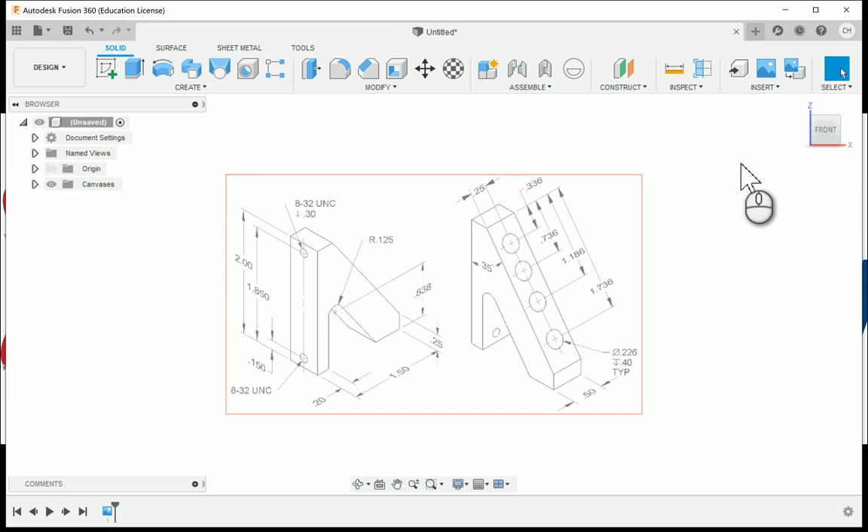In this video, we're going to take a look at modeling the Arbor Press punch holder. Here's a picture of the punch holder that we're going to go from. This is what you'll see on your activity and in the curriculum, and we're going to go through and model this part.

I'm going to go ahead and suppress this picture there. What we're going to do from here is create a new component. We'll call this the Arbor Press punch holder.

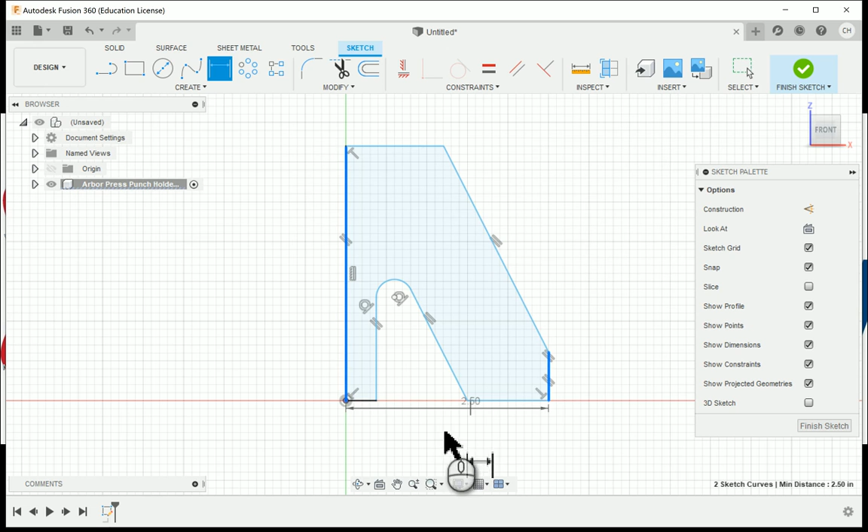What we're going to do is create a new sketch here, and we're going to create that on the front plane. To start off, we're going to go ahead and draw the profile.

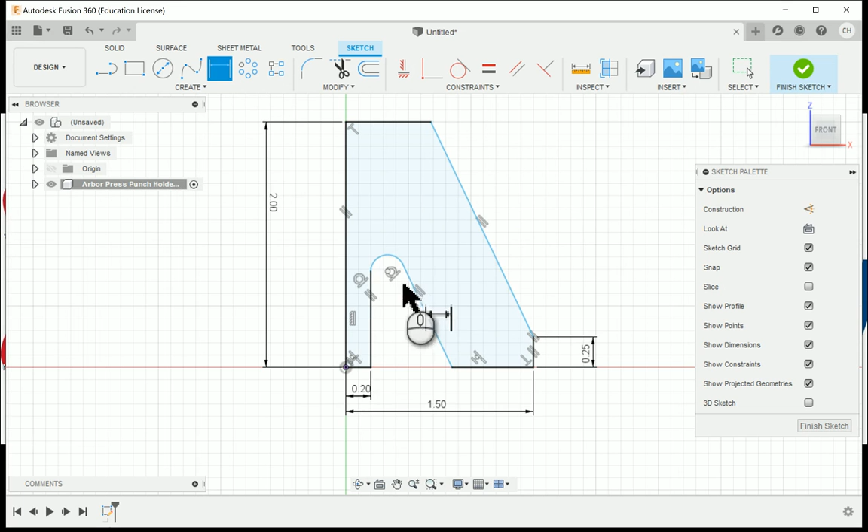When I get to this point, I'm going to show you there's a little trick here. I can actually go through and draw utilizing the line tool. The way I do that is I move my mouse out, come back to this point, hold down my left mouse button, and I can draw an arc in, then come down and connect. The other thing you can do is draw a 3-point arc in there to connect those points.

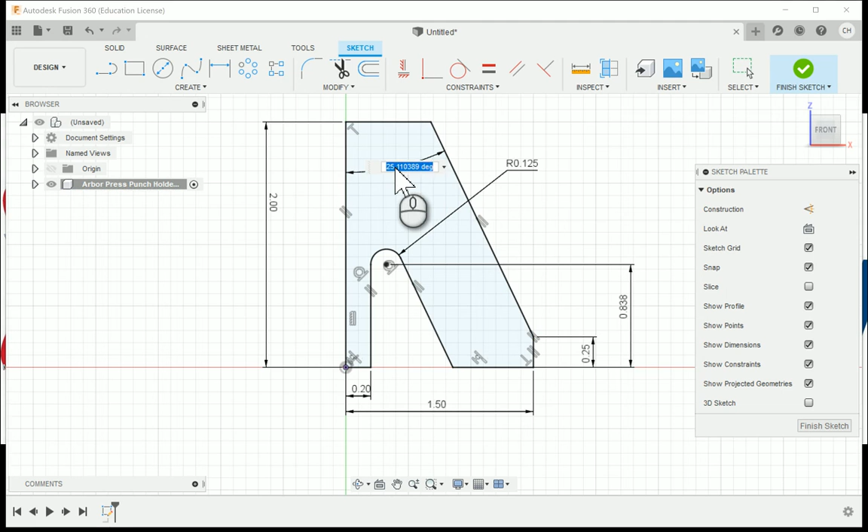A few things before we start getting going on the dimensions, let's go ahead and do some geometric constraints. Let's make sure we use the tangent geometric constraint. This line is tangent with the arc, the arc is tangent with this line, and then that's all taken care of there.

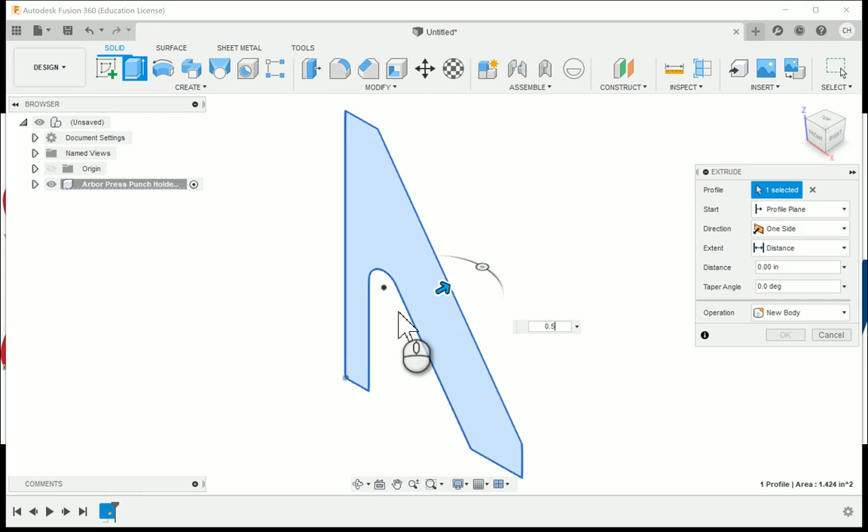The other thing we need to do is take a look at the parallel constraint. I need to parallel this line, this angled line, with this angled line. And then I can go ahead and start looking at some of the dimensions from here.

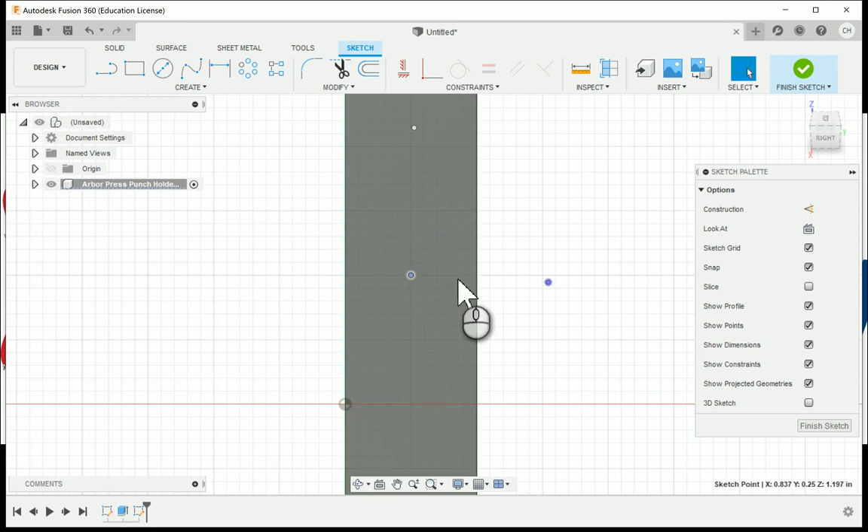So I'm going to go ahead and run my dimension tool. Looks like the overall width from this line to this line will be 1.5. The overall height is 2 inches. You'll notice they don't really give you the height of this portion right here, but they do give you a few little pieces like this height.

It's 0.25. Now the other geometric constraint we forgot to add was the collinear. So I'm going to go to collinear, choose the bottom line on this side, choose this bottom line. That way they'll stay in position together.

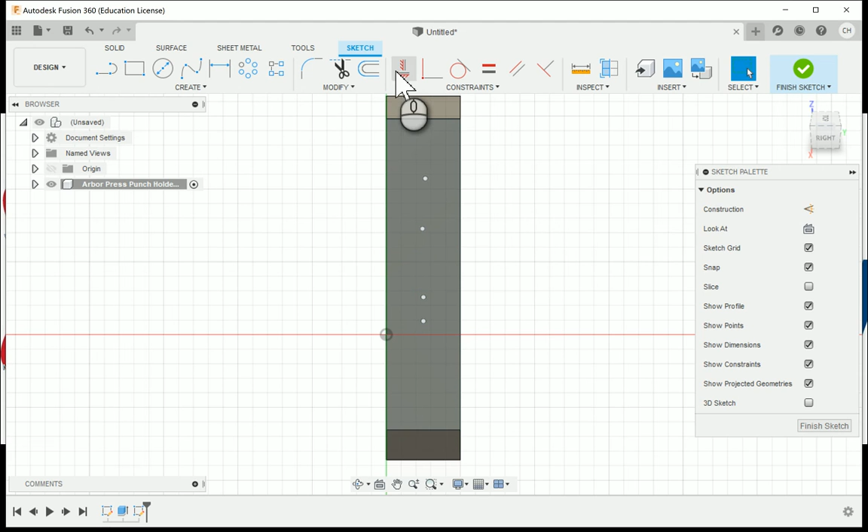And then I just continue to add some more of the dimensions. 0.2 for this section. And right now we've exhausted all those.

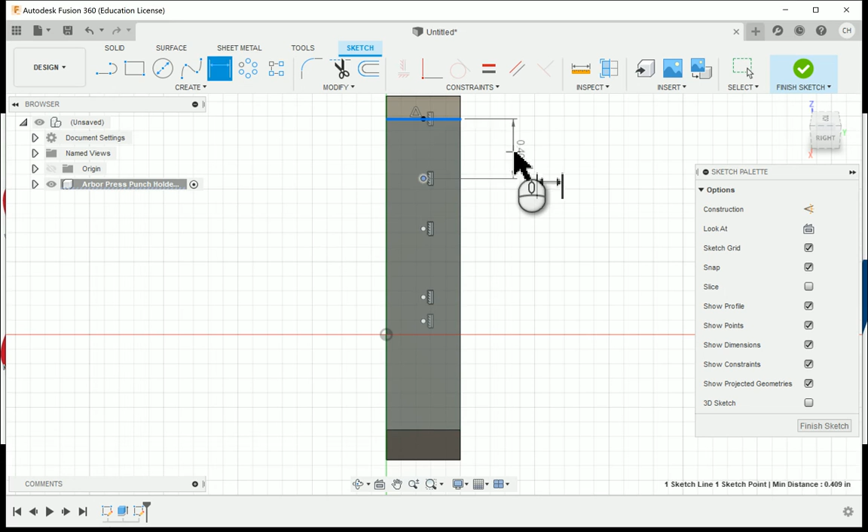The one that you will see is going to be an angular dimension. So between this line and this angled line, this one here is going to be set at 35 degrees. When you do that, you should see you get a fully constrained sketch. After you have all these, let me pull this angular dimension up there.

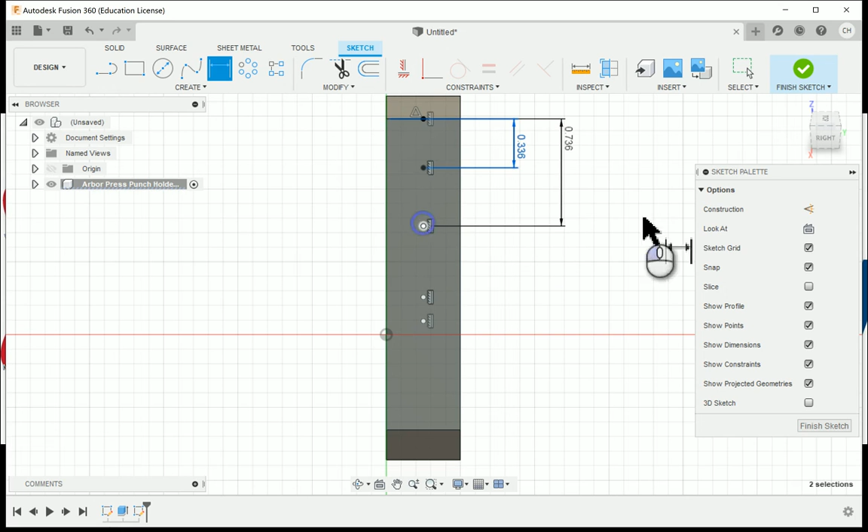You'll have this exact sketch and ready to go to finish. Finish the sketch, and I'm going to go ahead and extrude a thickness of 0.5, and I'm going to say OK.

The last part here is going to be to put in the holes. So I'm going to click on Create Sketch. I'm going to click the angled surface of the Arbor Press punch holder, and I'm going to create utilizing points. So I'm going to set 4 points in there. There are 4 holes

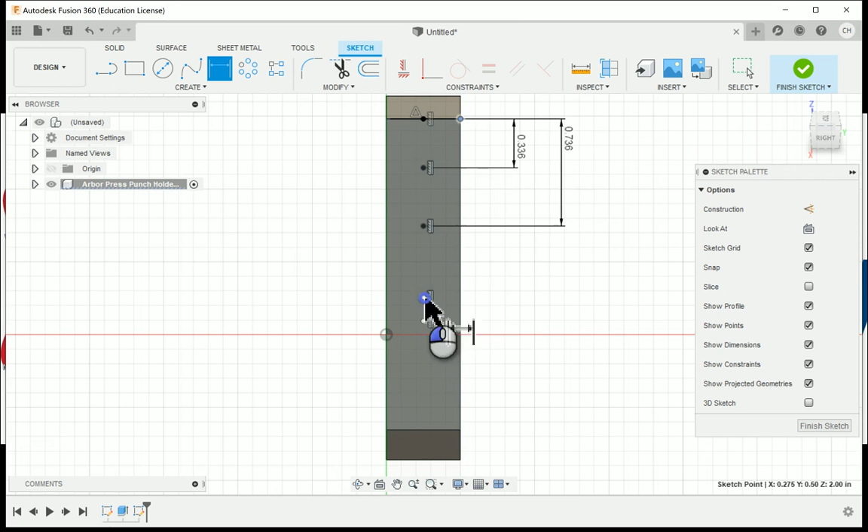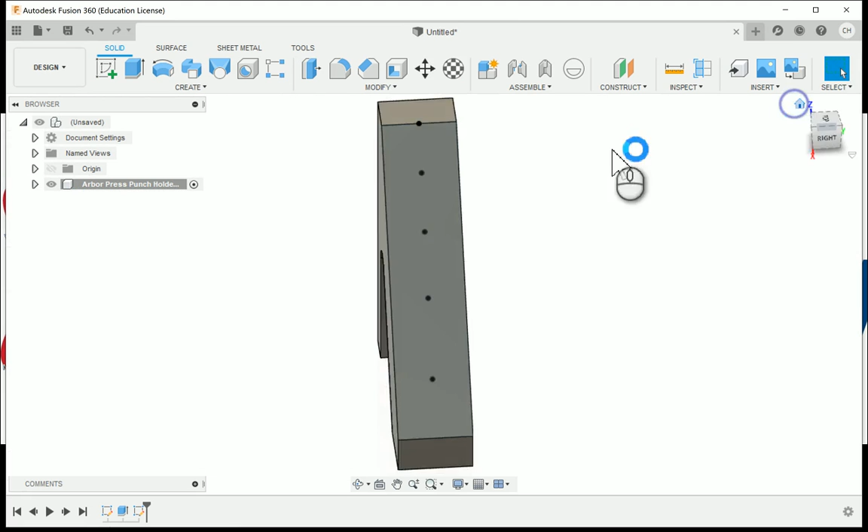that run along. Now you're going to see I clicked on this purple line. So here's what I'm going to do: I'm going to right click and say delete. It's on that purple line. And actually you're going to notice that this point may not move. I may have to delete this point because it will probably get constrained to something else. So if you see the little highlights like right there, don't click on that. I'm going to come above, maybe right about there.

Even if you don't set 4 points really close together, we can go ahead and dimension them. I'm going to do the horizontal vertical constraint. Along this top line, I'm going to hold the shift key until I find the midpoint, which has the X with the triangle, and then I'm going to click on this first point, and then just click on the first point to the second, second to the third, third to the fourth.

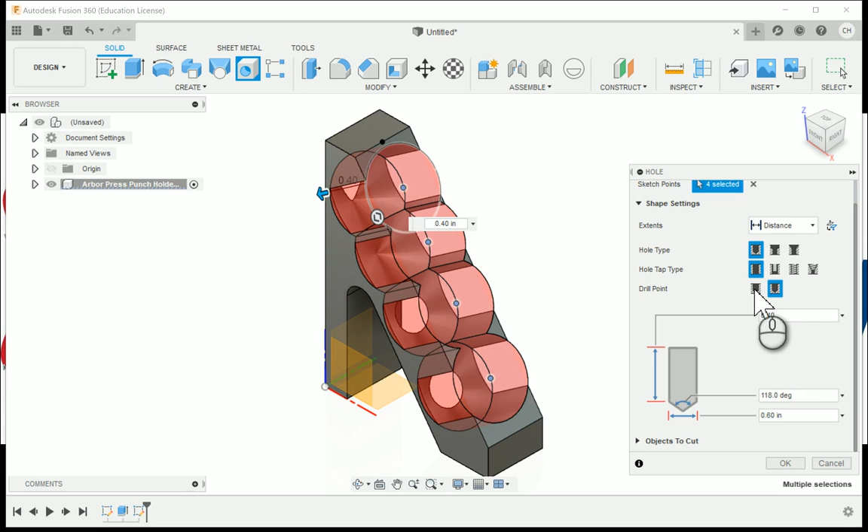That'll make sure that they're all vertically constrained right in the center of our part. From here, just following dimensions from this top line to this point, I end up having 0.336, and all of these dimensions go from this top line. So that's the one thing you'll want to look out for as you go along.

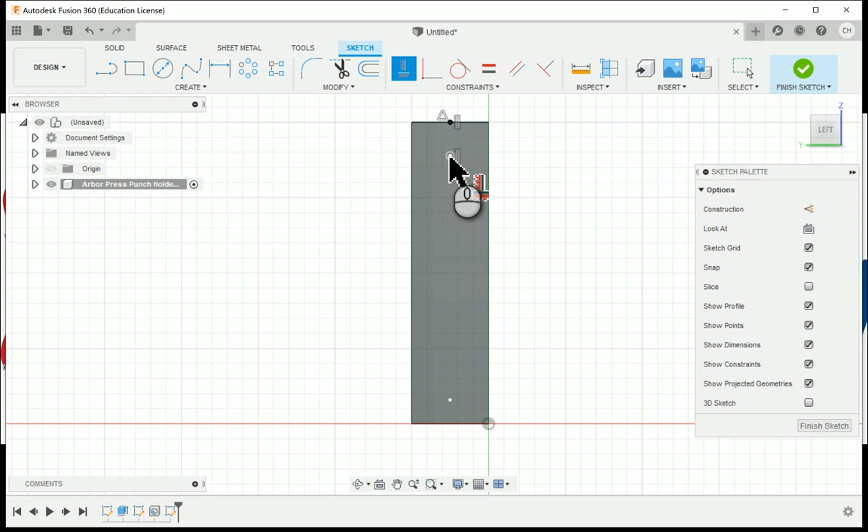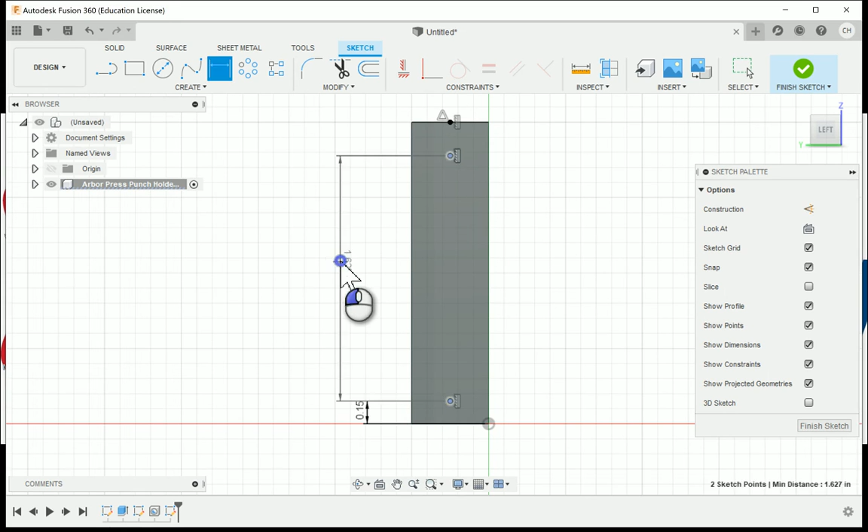Let me hit cancel here. There's a couple points, let me deselect. If you need to, you can always grab the corner as well. That seems to be working out better for me. So sometimes it's trying to select a previous dimension when you're doing that.

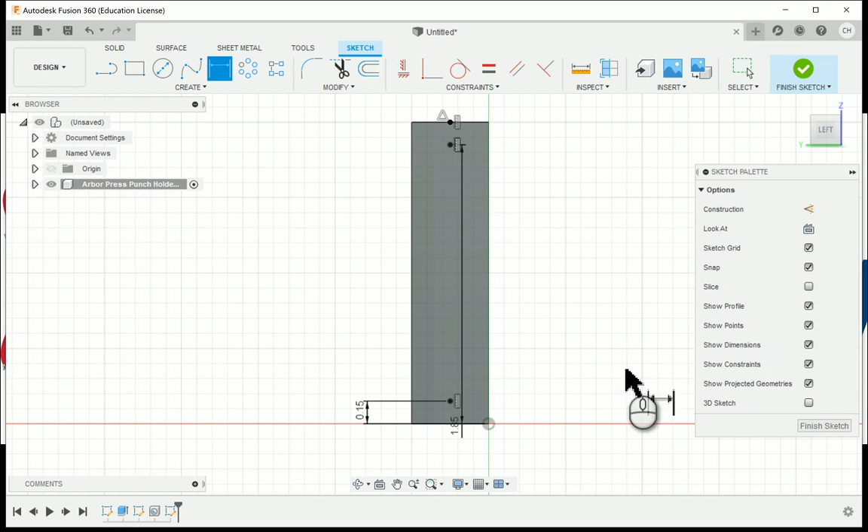Okay, I'm going to finish the sketch, and then I'm going to go ahead and ignore this top point there. That's just the midpoint being identified, but I'm going to click on the hole command. This time I'm going to click on all 4 of these points at one time.

You're going to see it's going to do this, and then we're going to check the hole note. It's a simple hole as far as distance. The distance that's drilled down is 0.40, and then these actually have a flat bottom drill point. So actually I need to choose the flat bottom drill point, because if you look, the top one and even these bottom ones kind of go through. We don't want these holes to show through, they're going to be flat. And then the diameter on these is going to be 0.226.

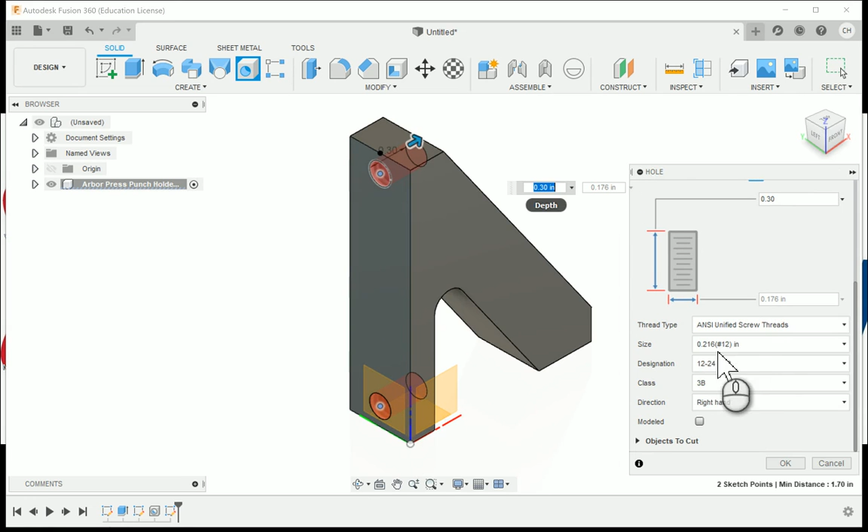Then I'm going to say OK. So that's going to give us our holes there on that side. The only thing we got left is on the back face.

I'm going to do a very similar process, create a sketch. Go ahead and create 2 points, one up towards the top, one up towards the bottom. I'm going to follow a very similar procedure. I'm going to click on the horizontal vertical, hold my shift key, find my midpoint at the top line, choose the first point, and then vertically constrain the first and second point together.

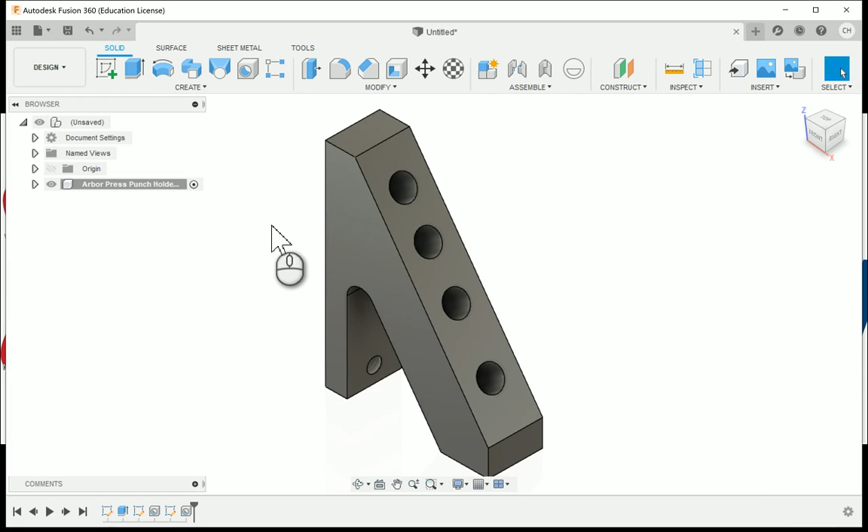Now, when I go through and I go to dimension, these are going to be, the dimension has the bottom one being located 0.150, and then they are located 1.85 apart.

Or actually, excuse me, let me go back here. Control Z. Actually, that 1.85 is going from the bottom, so let me delete that dimension, try that again. That looks better, and they're already turned black. Means they're fully constrained because they're in the middle.

I'm going to use the hole command again. I'm going to choose both points. They both have the same hole size. They're both drilled through at, so this one here is a threaded hole. So I'm going to have to choose the hole type, the third one here, which is called a tapped hole.

And in the tapped hole, you're going to see the depth is set in there for us. So we need to set the depth to be 0.30. And same kind of scenario as we go along, you'll see we want flat drill points as we go along.

And to set the screw threads, we need to go down to the size, hit the drop down. They want an 832 UNC. So if you look, the 832 is a 0.164 number 8. So when you choose that, there's the 832 UNC designation that we want, and everything is good.